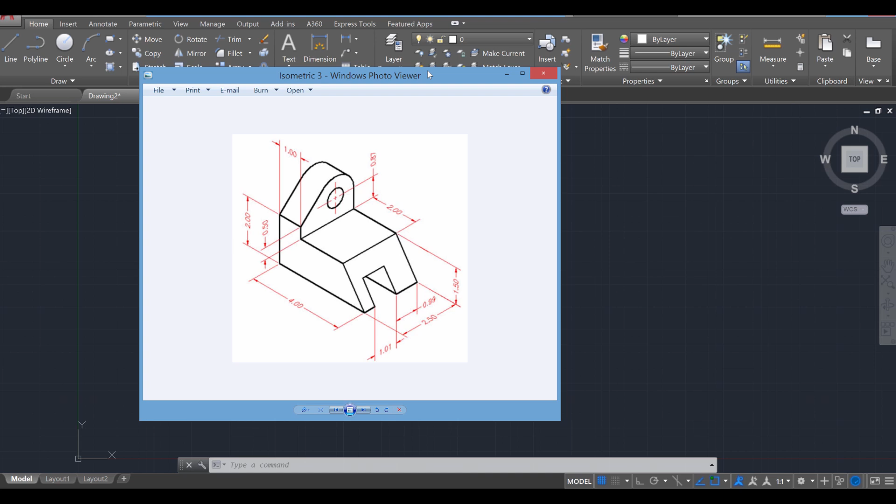And now let's begin. Okay, what I'd like you to do first is switch over from your top view over to a southwest isometric. Then turn on your ortho mode, turn on your snap mode. And over here, we're going to start drawing it with the line tool. So L for line, enter. I'm going to draw a line in this direction, a total of 4.

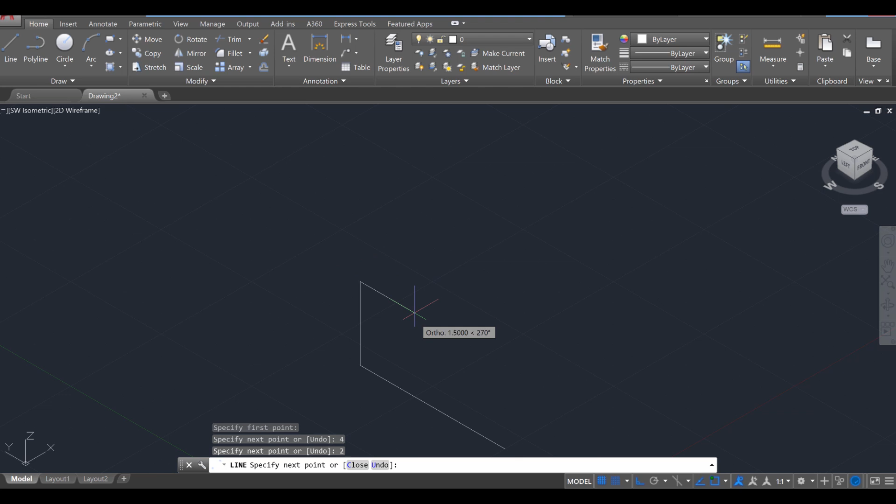Then I'm going to go up a total of 2, across a total of 1, down a total of 0.5, another across a total of 2, and then I'm going to connect these two together like so. Okay, I'm going to use the join command, J for join, select everything and join those all together.

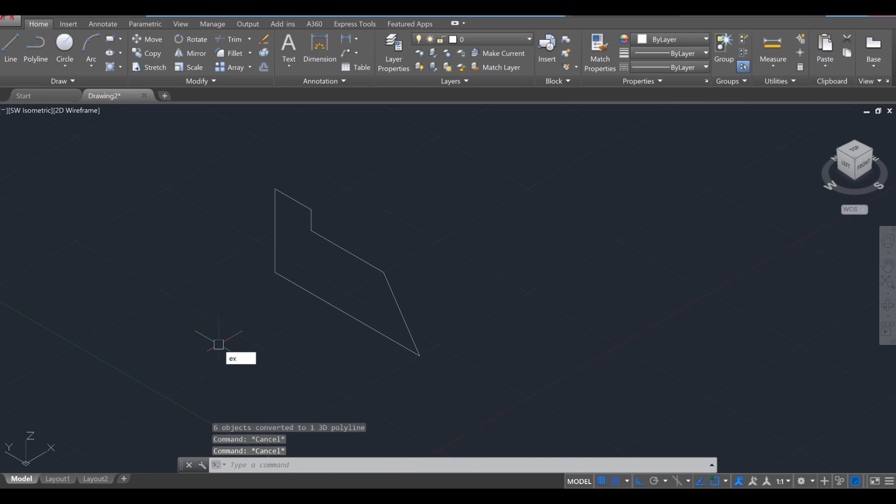Then I'm going to use the extrude command to extrude this out a total of 2.5 like so. Okay, I'm going to press escape twice. I'm going to turn this to the back side and I'm going to start with another line, L for line. Click on this point, go out a total of 0.5 units, enter.

Then I'm going to go up a total of 1.01 units apparently. Then across over here, another 1.01, and then down to connect it, or 1.01. And then I'm going to connect that as well. Okay. Once I've done that, I'm going to use the join command once again. I'm going to select the 4 lines here, enter.

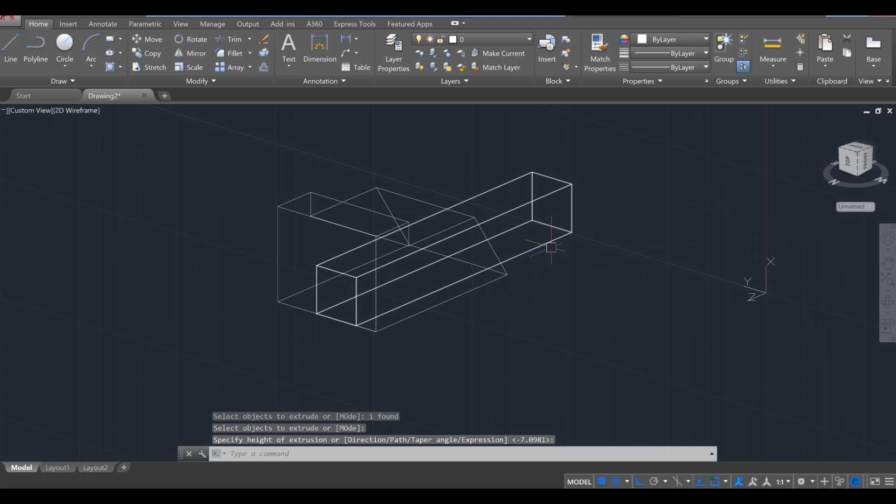Then extrude out the smaller object, ext, enter, select that, enter, and just go all the way out like so. Escape twice, then use the subtract command, enter. Select the large object first, enter, then the smaller object, enter, and it should cut that out. I'm going to press escape twice and delete this excess line here.

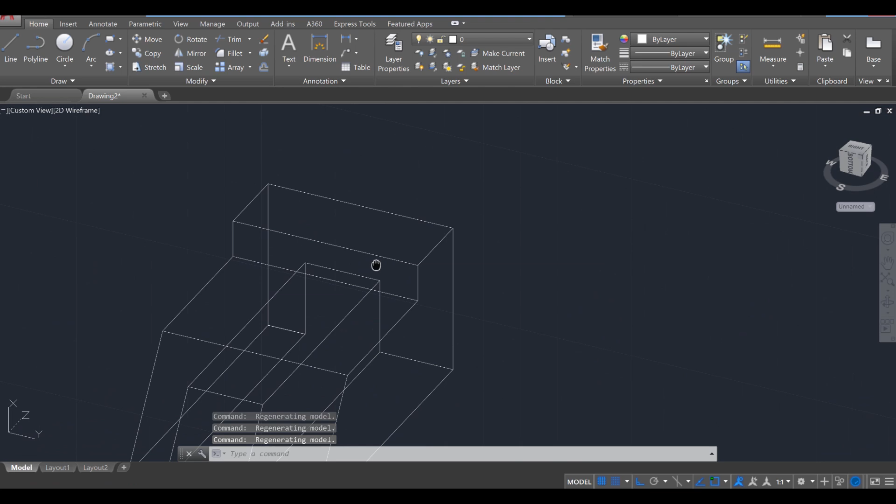Okay, and now we can add the top part in. And we're kind of lacking a little bit of information here, so we will have to come up with some good guesses on some of that information. But we're going to go ahead, turn off our snap mode to make this a little bit easier. Then L for line. Oops.

Okay, and starting from there, I'm going to go up. Oh, I thought I turned that off. Total of 0.87. Okay, and go in this direction. They don't give us anything, so we're going to assume it's also 0.87. Okay, so that's where the circle needs to go.

Now we're going to press UCS, enter, to move the XY coordinate system onto these lines here. So I'm going to do that with my X, that with my Y, so that we could draw the circle in place. So CIR for circle. Click on that point, and you might notice, let me try that again.

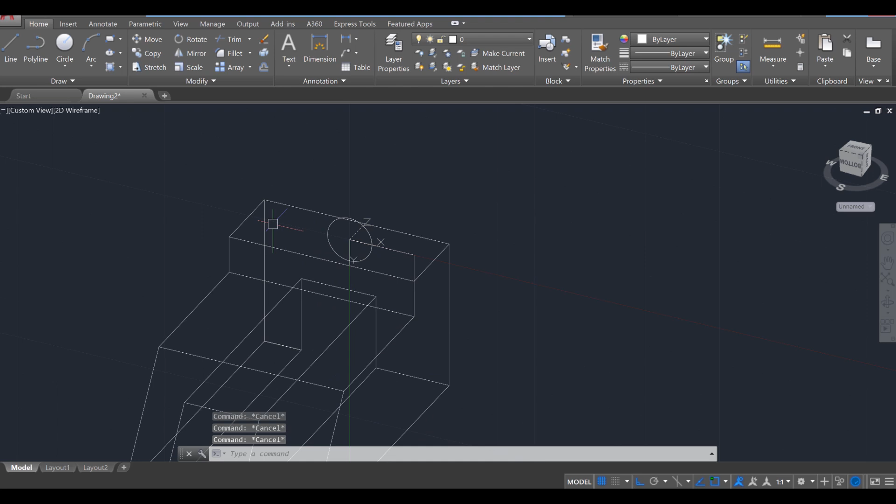There we go. That it's a fairly large circle, definitely more than 0.25, but 0.3 looks like a correct number. So we're going to say 0.3, enter, and we've put that circle in place. Then on top of it, we have an additional large circular diameter. So this one has to match up with that line there.

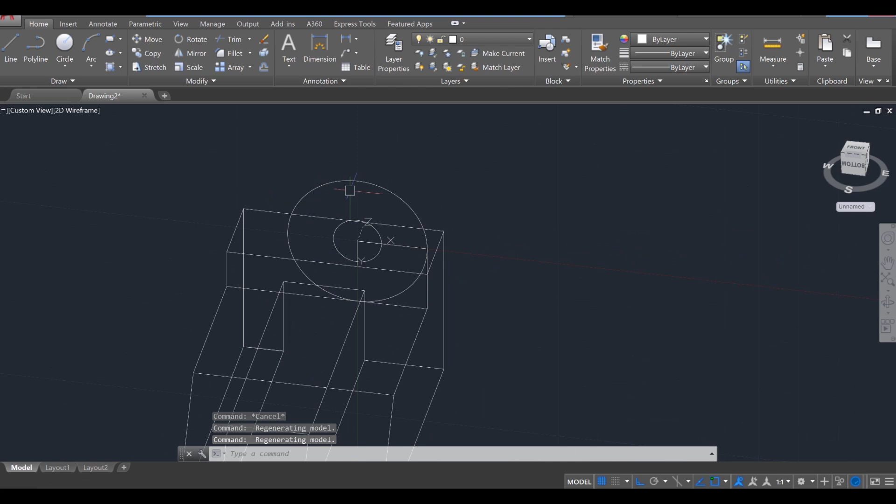So one more circle, CIR, hover to the outskirts, click on the center, and match it up with the top of that. Okay? Then lastly, we need to draw a line from this point that's going to be tangent with this circle over here. So I'm going to press L for line, enter, and I'm going to draw just a line, not really connected to anything right now, just above the circle like so.

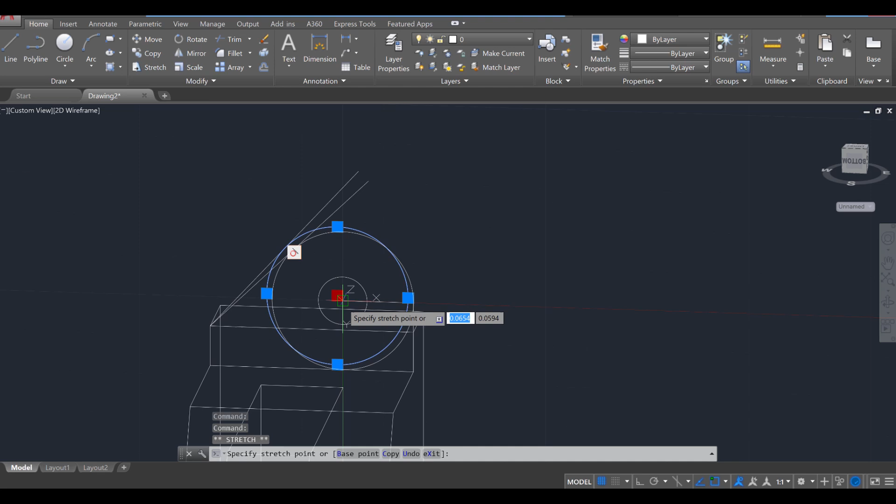We're going to make these two tangent from one another, so it's called GC tangent, enter, and then you're going to click on the top line first, then the circle. It's going to move the circle, which is fine. We don't really want to move the line. And then I'm going to press escape twice, select the circle, and move the center point back to the center point of the smaller circle. So you can kind of see that shape making form there.

Okay, I'm going to use the trim command to select those two objects, trim off the excess of this line, as well as anything unnecessary, which would be that. And then I'm going to go ahead, select this line and adjust it to up here.

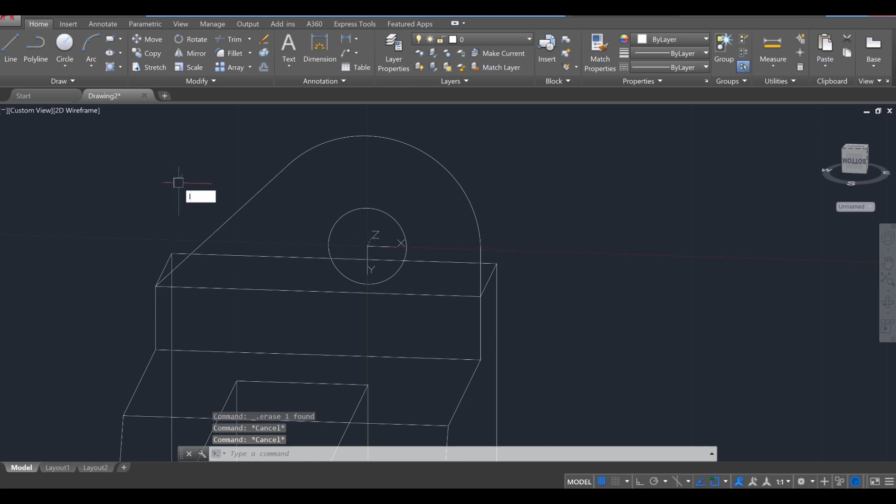I'm going to delete this line, and then I'm going to draw one additional line from that corner over to that corner. Okay, so I have this shape up here. I'm going to use the join tool, join, to join all the lines of this selection together. Okay, so they've been converted over to a spline, which is fine.

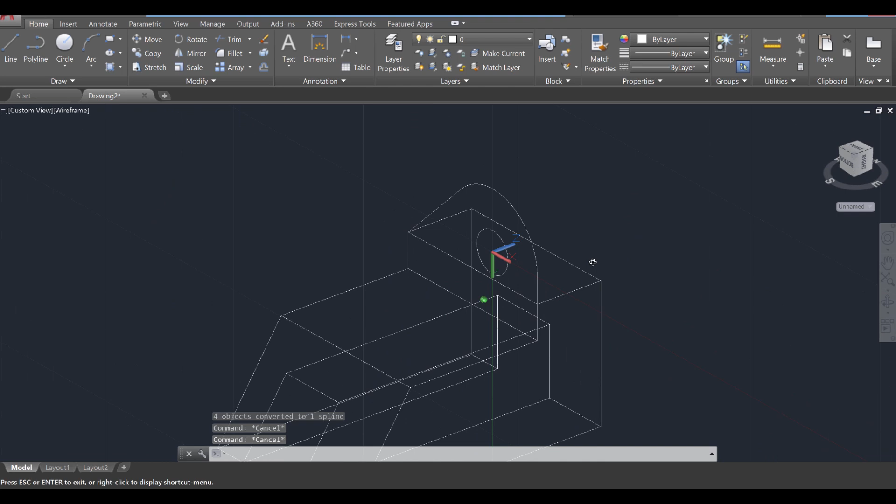And then I'm going to use the extrude command to select that and extrude it over to that point. Okay, let's go ahead and take a look at the shaded view. Okay, so that's looking pretty good except for that circle there. Okay, we could probably just cut it out here, so I'm going to use the extrude command and click on that circle,

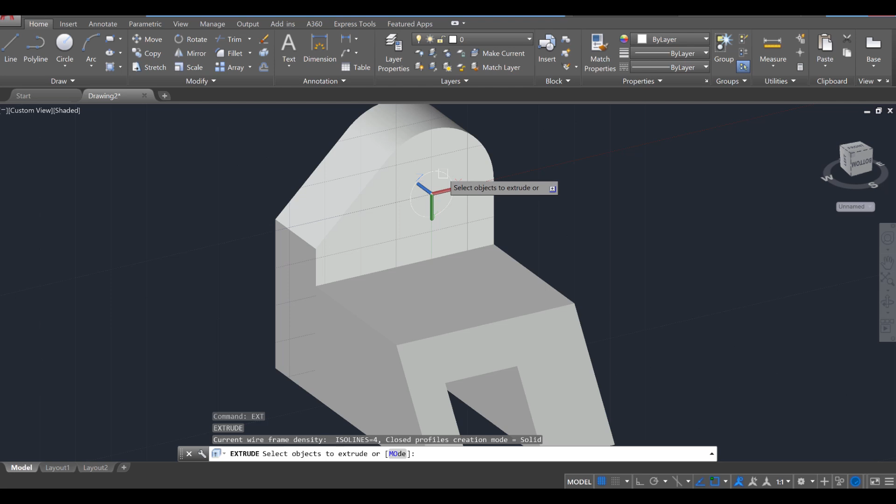extrude it outward like so, enter, and then I'm going to use the subtract command, select that, enter, and then subtract that, enter. Okay, and that cuts it out. I'm going to click on my XYZ, hover there, and move that back to world.

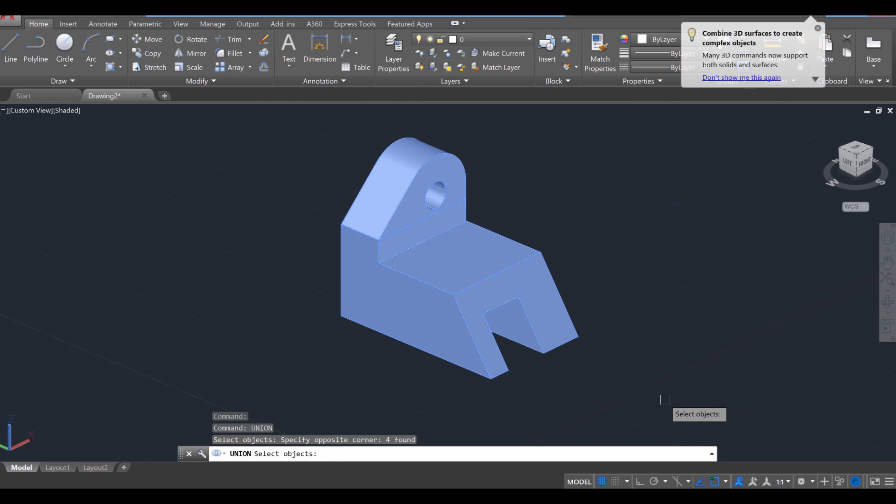And lastly, I'm going to use the union command to select everything and merge it all together into one object. Okay, and there you go. That's an intermediate level isometric with a tangent and some additional cool features.